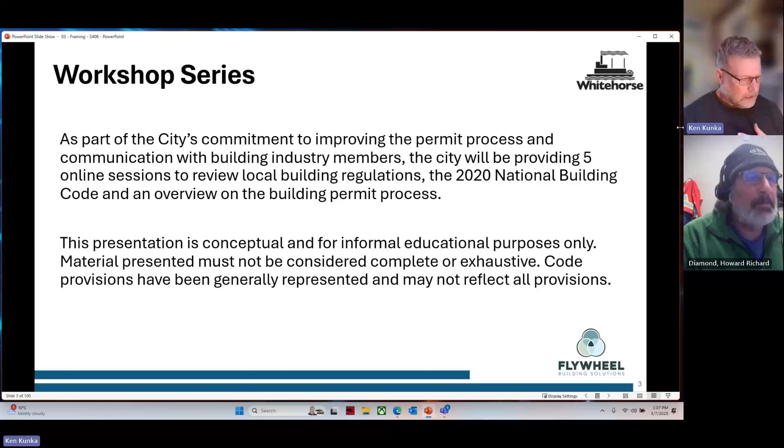What I'm trying to do in this video series is just remind you, as participants in these videos and presentations, of the parts of the code that I feel are critical. It's really up to you as an industry group to go into the code and read in more detail.

Our workshop series: January 15th of this year was a general overview with excavation, and February 12th and March 5th covered fire protection, which we recently recorded. Please also review that in our video series, as part of the process of developing guidelines and bulletins related to the permit process and a better understanding of how that relates to plans and inspections leading into occupancy. We're hoping to have that mostly done by the end of March 2025.

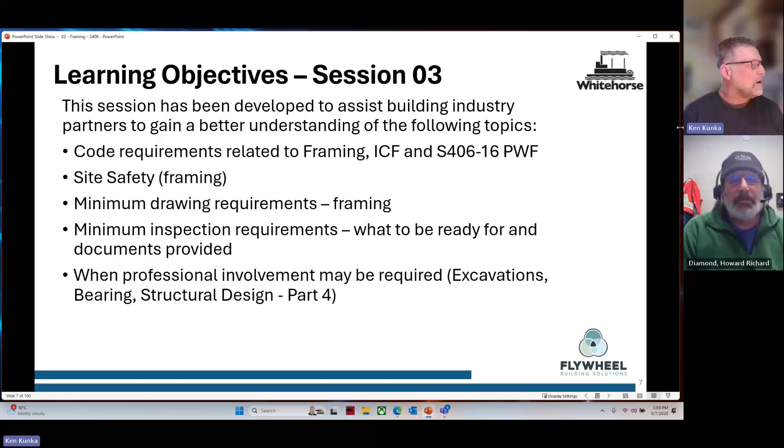Learning objectives in this session: again, to look at the code in general and dig into some of the specific requirements related to framing. So we have code requirements related to framing, site safety items - a big reminder for both building officials and our industry partners to make sure sites are safe - minimum drawing requirements, minimum inspection requirements, and when professionals are involved, since those have been updated a little bit along the way in the last 12 months.

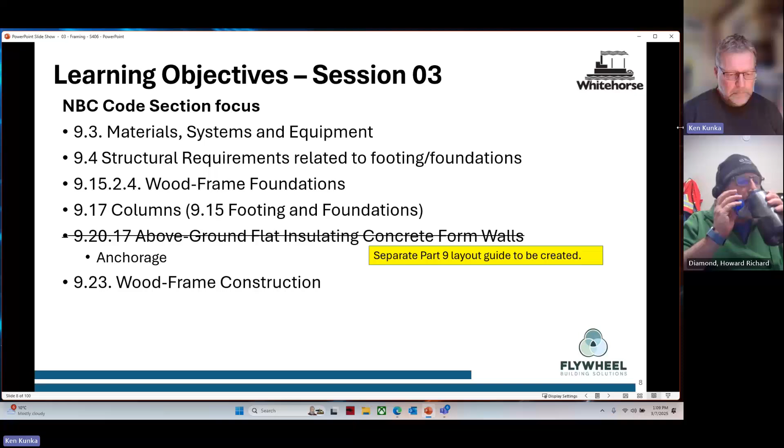We're going to dig deeper into 9.3 material systems and equipment, and 9.4 structural requirements. So just a little bit of back history, why it's in the code, and some basis for moving forward on developing wood frame foundations, columns, and wood frame construction. I was going to develop a bit more on above-ground flat insulating concrete formwork, or ICF, but I think what we'll do is work on a separate guide related to that.

The learning references in developing this webinar series: obviously the building code itself, the 2020 edition. There is an update on the Housing and Small Buildings Illustrated Guide, so I've pulled a few of those diagrams, but this is a great resource document for you and anyone using the National Building Code. We have the BC Housing Safe and Durable Wood Decks and Balconies guide, which is great for building better decks and balconies - I'll provide some reference points to that. Also the Canadian Wood Council Span Book and a prescriptive residential exterior wood deck span guide.

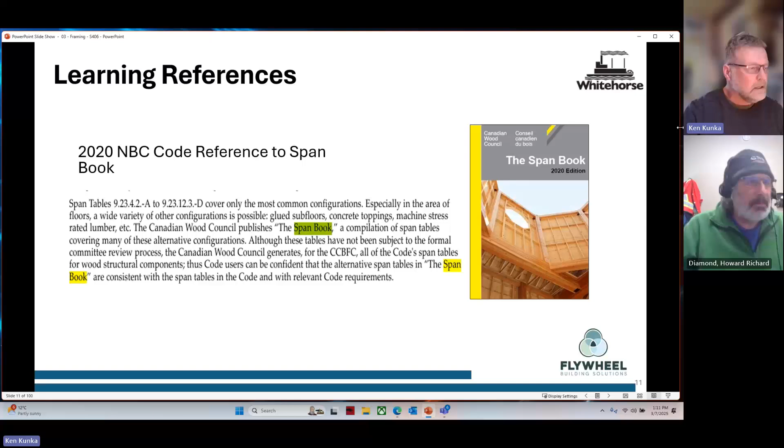As I was going through some of the other guides, I was referring to this older document related to decks. There have been questions related to the span book, but within the National Building Code appendix note, it actually makes reference to it. So I think we're in good standing using this document, which is actually quite thick.

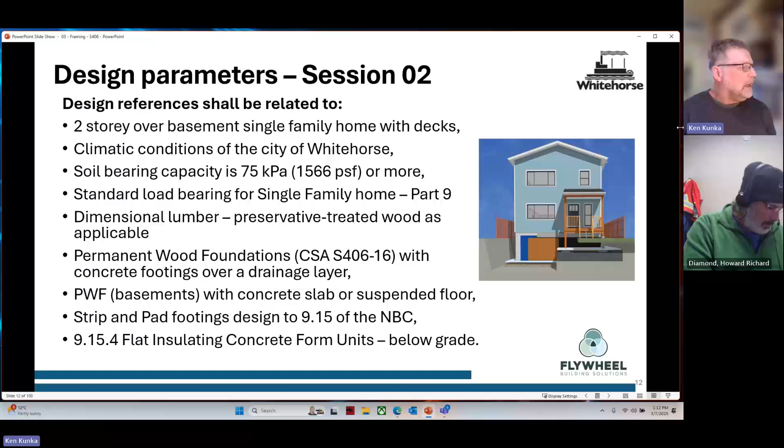I've been using a reference house that I've been slowly building out, and this will be the reference house we'll use in developing the guide related to good drawings and how those drawings relate to inspections out on site moving into occupancy. It'll be a two-story over a basement, single-family home with some decks, using climate conditions of Whitehorse, soil bearing capacities - that's minimum 75 kPa within the code. Standard load bearing, nothing very special about the design itself. Dimensional lumber, permanent wood foundation, but we also like to look at an ICF design as well, with typical strip and pad footings.

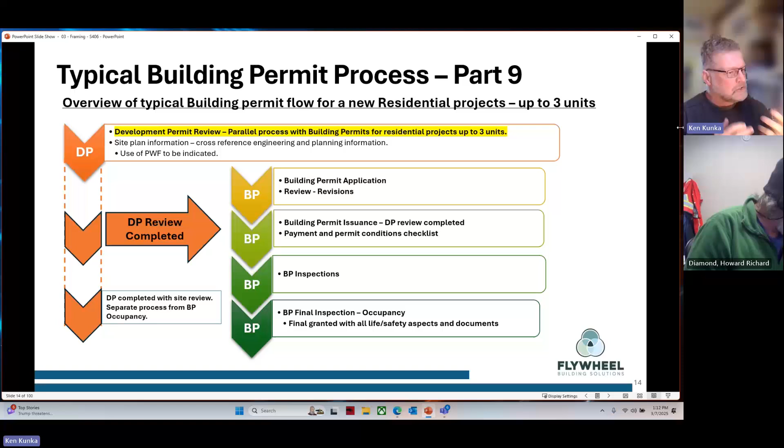Typical building permit process - just as a reminder, the development permit review process has provided a parallel process for up to 3 units. It used to be a two-step process and now it's one-step. But the challenge is ensuring communication between both parties, planning and engineering and the building department review, especially as revisions are required or provided, just ensuring the parallel review process doesn't break down moving into issuance.

It's critical to ensure the BP application is filled out and all required information is provided. Please read the application package in full to ensure all required information is provided. In 2025, to improve efficiency of the plan review process, if it's incomplete on the application side, it will not be accepted. Please note the BP, site plan, and lot grading information should match your building permit drawings.

When you deal with different structures, perhaps even retaining walls, but particularly garden suites, they will more than likely require a separate permit. Referring to the city's permit checklist guide is of critical importance in developing a good permit package, and all drawings should provide enough information to show substantial compliance to the code and city regulations, which helps reduce turnaround time for review and reduce requests for further information to ensure compliance.

Please apply early. Do not wait until the end of spring or early summer if you are planning a project in the summer. There's a lot of volume coming in, and particularly with some of the changes in processes, we want to ensure nobody is left caught with an extended review time because of volume.

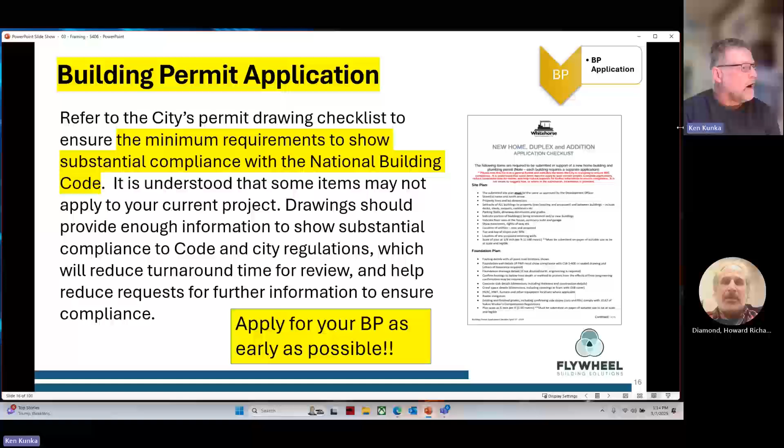Building permit drawings - it's important to ensure your foundation, floor plans, sections and details clearly show framing systems dimensioned clearly, location of all walls and point loads to the foundations, your joist, rafter, truss, beam sizes, and your layouts are provided. Those are your manufactured layouts of floor systems, engineered floor systems, or truss systems, making sure point loads and bearing details are clearly shown and reflected in your design drawings.

Any required bridging or blocking is shown, and any manufactured beams, lintels, roof trusses - making sure all those components that are third-party shop drawings are transposed into your design drawings. These items may be submitted prior to the request for a frame inspection. As part of the new process, you provide those truss drawings, the floor joist drawings - they don't have to be sealed, but when you move into the framing process, you do have to provide sealed truss packages at framing time for a proper inspection to ensure all engineering components meet minimum standards.

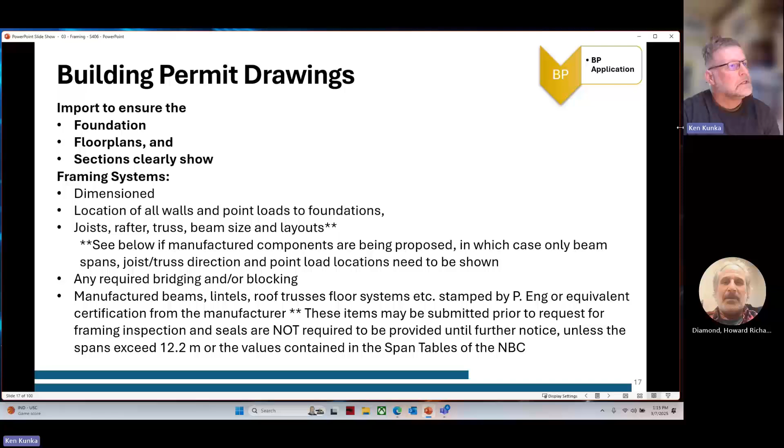The building permit application professional involvement - I'd highly recommend reviewing the website and these bulletins outlining the new requirements, and also reference the building bylaw 9950, which I believe will be updated sometime this year into next, just keeping up with changes in our industry.

The factors for the city requiring increased involvement for engineers: new house designs are narrower, our subdivisions are different now - narrower lots, longer lots. You have open plan layouts with larger point loads outside the scope of Part 9. We have an increase in engineering building components and proprietary products not listed in Part 9. And soil conditions can create concerns related to safety, bearing capacity, drainage and backfill. In some of our newer subdivisions in Whitehorse, the soils are a little different, creating concerns already regarding bearing capacity and frost action.

Quick review again with climatic data in Whitehorse. We're in climatic zone 7B, just a reference point on our snow loads. It's interesting for myself, working down in Summerland, British Columbia, and then coming up to Whitehorse and looking at climatic data - the snow levels are actually quite light compared to other parts of British Columbia, particularly where I am in Kelowna.

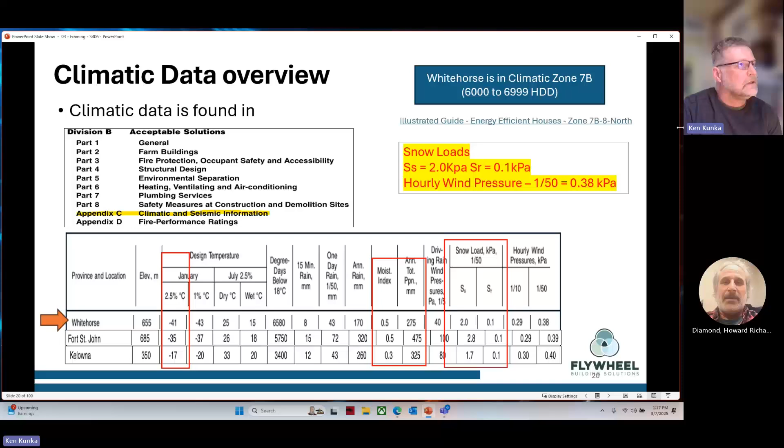So there's our snow load - we have a roof load of 2 kPa, and a rain of 0.1. Again, fairly light. And our hourly wind pressure, which will probably come more to a concern as codes are updated and we look at more lateral load bracing for wind and seismic.

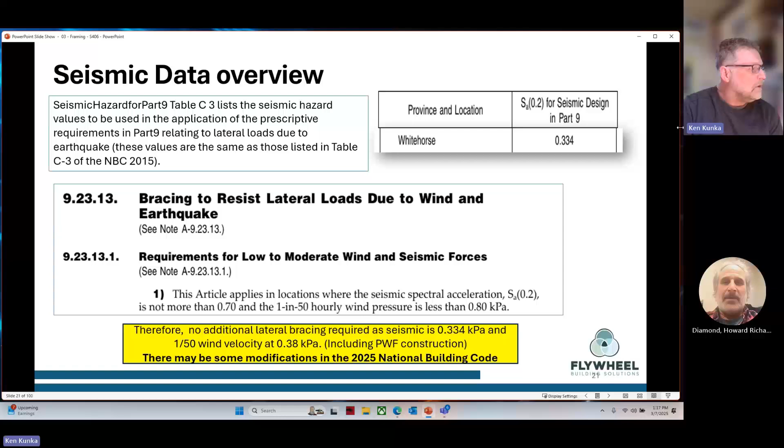And speaking of seismic, right now, as the code stands and your seismic data within the Whitehorse area, we're not really concerned about this. I'll touch base on it one more time as we close up the seminar today. So no additional lateral bracing required right now, but I just want to touch on that one more time as we move through the slide deck.

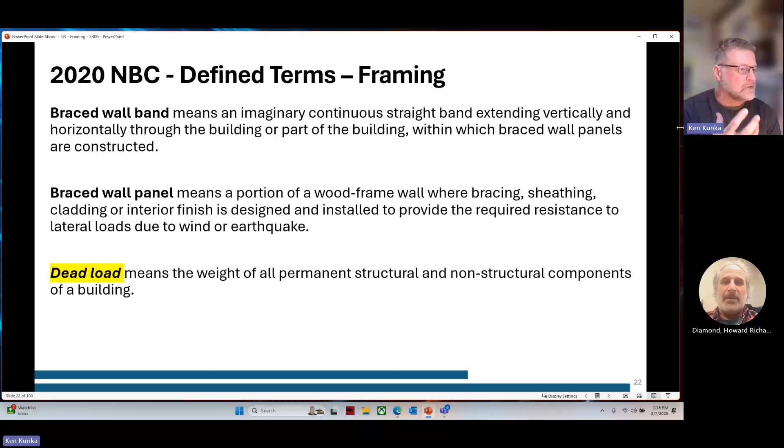Some defined terms: braced wall band and braced wall panel - not necessarily right now, but as we move through the summer and the new codes are looked at updating into 25, 26, this may come into play. You have your dead load, meaning the weight of all permanent structure and non-structural components of a building. That's your superstructure, your gravity loads that you're thinking of when designing your spans and loads accordingly.

You have your live load, meaning a variable load due to intended use of an occupancy - the people in it, or the type of use. Different building types, as you get into commercial operations, have a different load parameter than residential. That's the occupancy type. Assume the design and structural members of the building includes loads due to cranes and pressures of liquids in containers - these things that come and go are in it. Again, snow and rain are live loads as well.

We have load bearing - thinking about our structure, we have non-load bearing walls and load bearing walls, and they have different parameters. We'll go over some of the charts later on, particularly regarding wall assemblies.

We have a rim joist - that's really the only defined term. When you get into the details of framing, it means the outermost member of the flooring system, other than blocking, be it parallel or perpendicular or at an angle to the floor joist. A rim joist in the field may also be referred to as rim boards, headers, and header joists. So there's a mixture of terminologies.

I typically would throw an unsafe condition, because that gives some allowance for our building officials to determine potentially unsafe conditions, whether a permit is required, or there is an unsafe condition during the construction process.

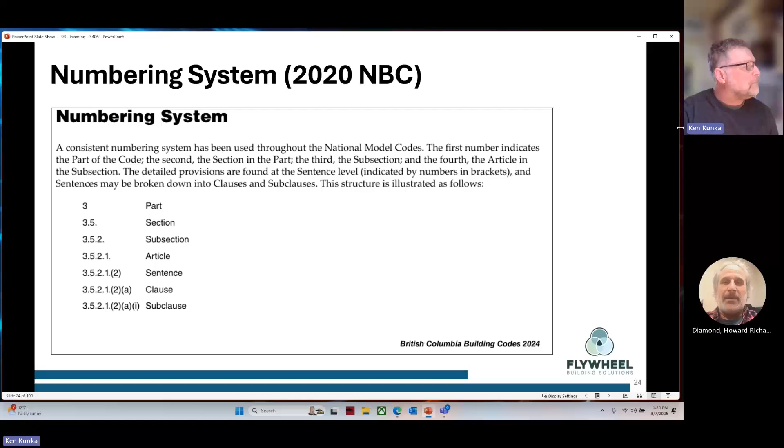9.3, materials, systems, and equipment. The materials, systems, and equipment commonly used in the construction of buildings are covered by standards prepared by various organizations. These standards are referenced throughout NBC Part 9. NBC Section 9.3 was developed to provide requirements specific to three basic construction materials, namely concrete, wood, and metal.

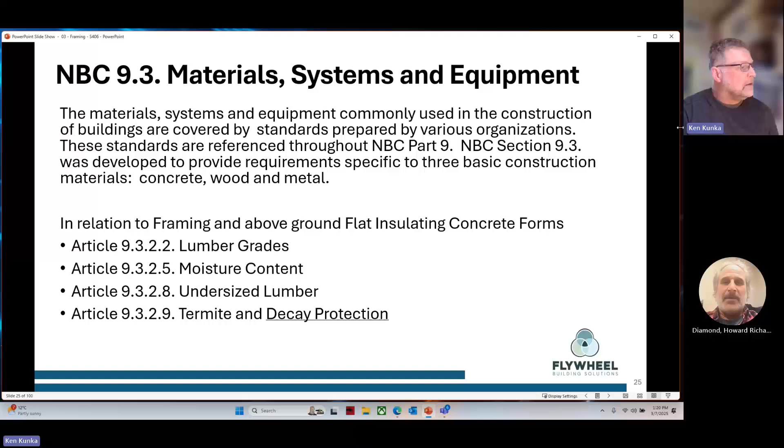In relation to framing and above ground flat insulating concrete formworks, we have 9.3.2.2, lumber grades. We have a review of moisture content on undersized lumber and termite, and particularly decay protection.

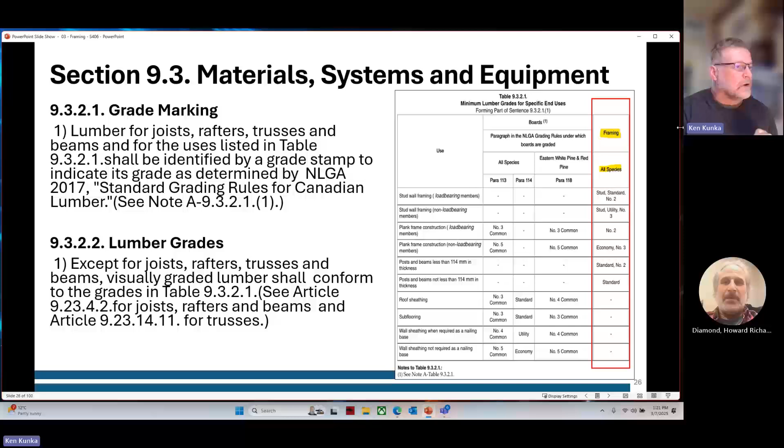Grade marking for lumber used in joists, rafters, trusses, and beams as listed in table 9.3.2.1 shall be identified by a grade stamp indicating its grade, as determined by the standard grading rules for Canadian lumber. It's really important to understand that. On the right side of the screen we have framing, and the nice thing is we have all species represented, not just a particular type. But you do have to be cognizant of the standard or quality of wood, so we have number 2, number 3, and economy grades, and where those are used.

Machine stress rated lumber, we just went over that, it's defined in the code at 9.3.2.4. There's also an outline for OSB, wafer board, and plywood marking, and those all have similar types of marking.

But the most important thing I noticed when I was up in December, and a bit of a concern for myself, was the moisture content. The moisture content in wood being delivered on site should not be greater than 19%, and that should also be maintained through the construction process. What I was seeing in the winter months was a lot of heat going in, with a lot of moisture in it, probably from propane or whatever was being used, and you could see a lot of frost actually building up in the walls.

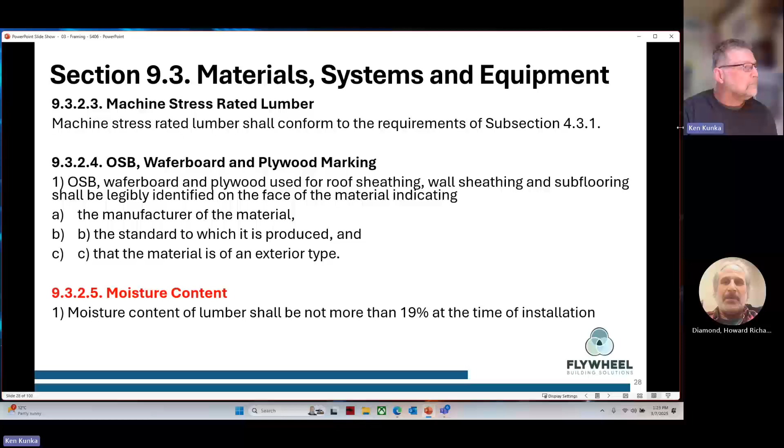This is a huge concern, because once framing inspections are completed and you're moving into insulation, vapor barrier, and air barriers, you could be locking a lot of moisture in if you're not taking particular precautions. So again, the maximum moisture content permitted for lumber at the time of installation is 19%.

At that moisture level, more than half of the wood's normal shrinkage will have already occurred. That's a big part, especially if you're building higher buildings in wood, where you can get a lot of shrinkage horizontally, not vertically in a stud, but in a plate. A plate could shrink anywhere from an eighth to a quarter of an inch. After a number of stories in wood, even a 3-story house with a deck attached that has vertical posts, you can see a significant change in how the building shrinks and dries if it's at a higher moisture level.

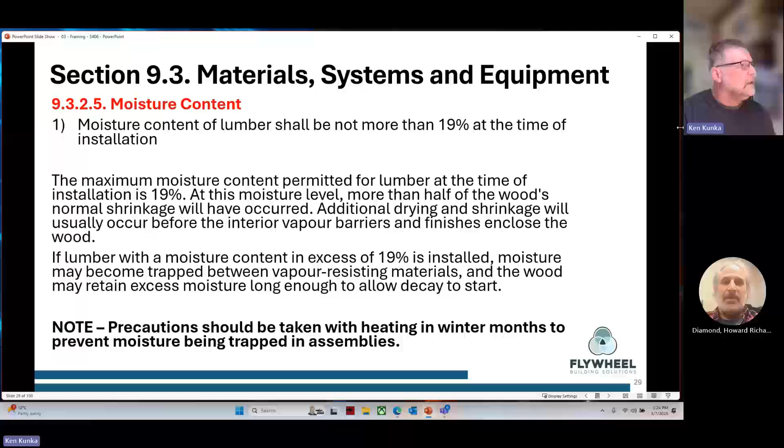Plus the issue of having all that moisture locked in and then sealed up could lead to significant mold and eventual structural damage, which we experienced here in BC a number of years ago. Not necessarily termites we have to worry about, but we do want to be cognizant of decay protection, which is why there are minimum requirements.

I know a lot of the wood being used in your area, particularly for foundations, is permanent wood foundation material. But when you have other elements, like a deck, or you're framing above your permanent wood foundation or ICF, there's a minimum level you want to keep it at if you want to use standard dimensional, non-treated lumber, which is 6 inches or 150 millimeters. Structural wood elements below that should be pressure treated, so that's at 6 inches.

And where wood elements are not protected from exposure to precipitation, such as an open draining deck, or a configuration conducive to moisture accumulation, you need to be careful. There are some really odd, modern designs coming in now, like butterfly style roofs, or roofs leaning back toward the building itself, which can hold moisture.

We have frost action too, which we've talked about a couple times now, that can actually direct moisture back as well. And thankfully, at least we don't have a moisture index to worry about here.

There are many above ground structural wood elements where precipitation is really trapped and drying is slow, creating conditions conducive to decay. This happens with elements that have elaborate detailing where you're not really thinking about flashing and how water and snow can get in there. And again, your grade clearance can be a problem.

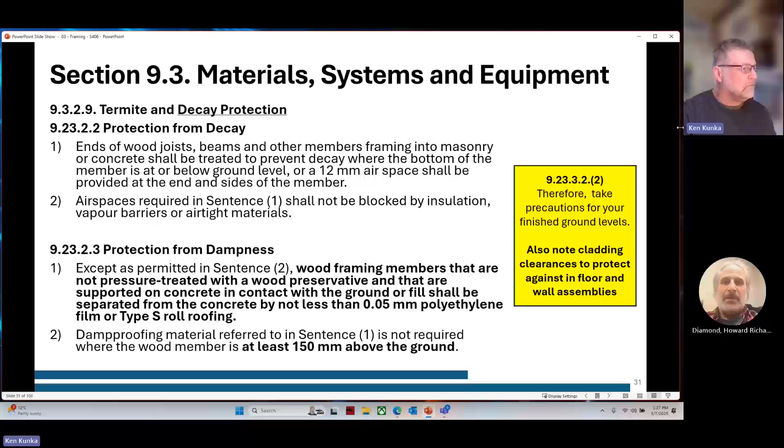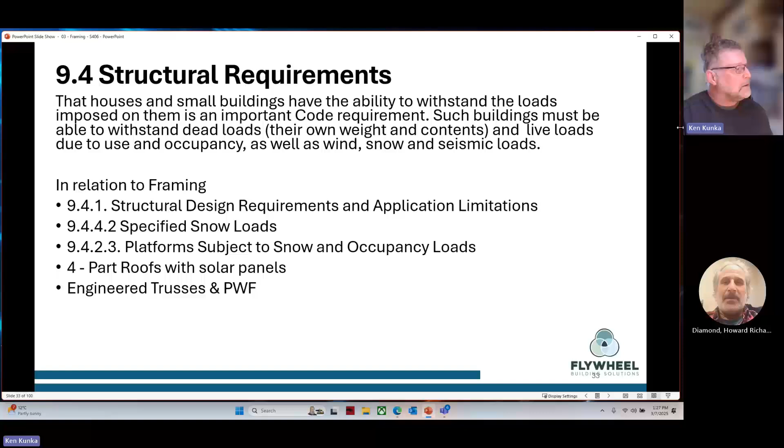The structural requirements, 9.4. We're just going to touch on these four or five elements here: 9.4.1, 9.4.2, the specific snow loads, platforms subject to snow loads, so your decks and deck uses, roofs, Part 4 roofs and solar panels. This again touches on the changes happening regarding engineered trusses and permanent wood foundations in engineering.

Structural design requirements and application limitations. Again, a lot of my sessions are just talking about code and showing you code. So I just want to make you aware of where it is in the code and really ask you to go into it and get a good understanding.

Looking at item 1C: be designed in accordance with Part 4, using the loads and deflection and vibration limits specified in Part 9 or Part 4, where floor framing is designed in accordance with clause 1B or C, and where supporting wall framing and fastenings or footings are designed according to clause 1A. You'll also notice in a lot of the code they're back referencing, saying 'except for,' so be mindful as you're reading through this that you're also cognizant of other parts of the code or another standard.

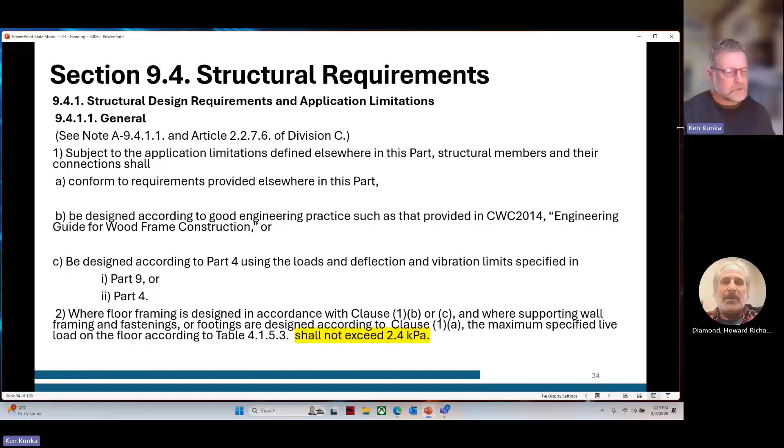Again, here we have CWC 2014. As you go through particularly structural building products, you want to look at these, and really we're dealing within a specification of loads. In this one, the last sentence, highlighted, shall not exceed 2.4 kPa or 50 pounds per square foot. So again, there are some limits on the loading, dead and live loading here.

This is an example of the specifications to keep you within Part 9, designing a true Part 9 home. Homes are a lot different than they used to be. They're narrower, have more open floor plans, more point loads, and more detailing, which makes it difficult to keep a lot of these projects within Part 9. So Part 9 here is specified loads.

We're dealing with very standard construction. The subsection applies to light framing construction, whose wall, floor, and roof planes are generally comprised of frames and small repetitive structural members. Again, keeping it very simple. The whole point of Part 9 was to have basically a homeowner do this, so the structural design should be very simple, and a lot of it is prescriptive in Part 9. The roof and wall planes are clad, sheathed, or braced on at least one side, with small repetitive structural members not spaced more than 600 millimeters or 24 inches.

The clear span of any structure does not exceed 12.2 meters, which is about 39 point something feet. So when we're looking at trusses in homes or Part 9 buildings, which could be commercial as well, if you go over that line of getting to 40 feet, you're now kicking that from a Part 9 type structure into a Part 4 design. So for engineered trusses, say a 42-foot wide building without a center bearing point in that truss, you're going to kick that into a Part 4 component.

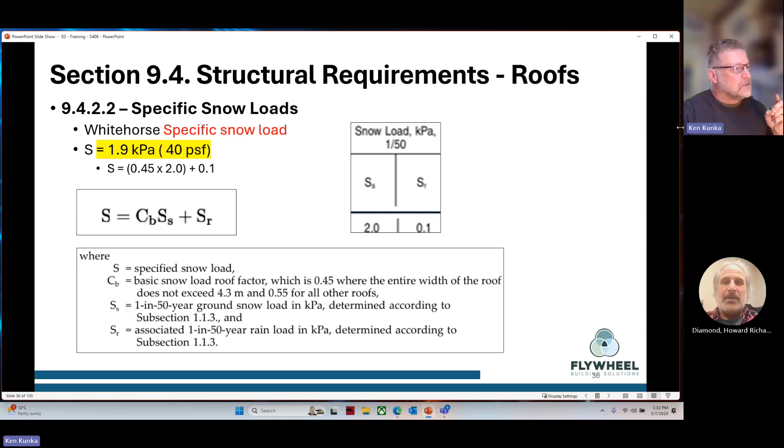Thankfully we don't have really heavy roof loads, but when we get into decks, decks shall be considered as roofs - we can treat them both the same because of the 1.9 kPa requirement. Balconies, decks, and other accessible exterior platforms intended for occupancy and subject to snow loads shall be designed to carry the specified snow load or 1.9 kPa, whichever is greater, where the platform or each segregated area of the platform serves a single dwelling unit. It's important to keep that dwelling unit distinction in mind.

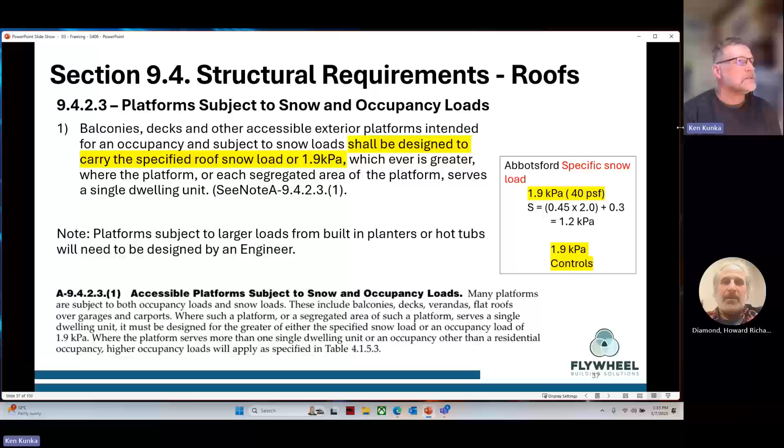Here's an example - I used Abbotsford, not sure why, but it's very similar to the relationship of what's happening in Whitehorse, showing a platform subject to large loads from built-in planters or hot tubs. If you have one of those very heavy loads, almost more permanent even though they're technically temporary - a hot tub is temporary but it is a structure - you'll definitely need engineering on that. There are some appendix notes covering this.

The NBC, as well as the BC, has now done a more thorough review of how solar panels affect roof loading, and there are newer parameters built into the design requirements. It makes sense to take advantage of solar given the sunshine in summer, but even though photovoltaics are very light themselves, and may run parallel to the slope of the roof or sit flush, they do have a tendency to collect snow due to wind drift, especially where panels are lifted up. If you have a lower slope and the panels are tilted up to maximize solar gain angle, that can create significant issues. Similarly, certain roof types like metal roofs with snow breaks can create problems by holding snow in a position it was never designed for. You want to take these factors into consideration when designing your attic specifications and roof layouts.

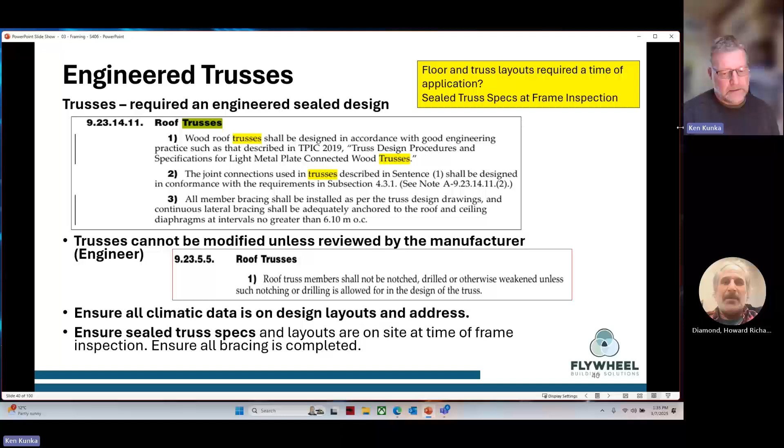Because they are very specific in design, they need an engineered layout of the roof system and particular specifications for each type of truss or girder truss. Again, that's nothing new—that's why the bulletin is going out as a reminder.

Another point is roof truss connections—the metal connectors—which are very specific and have to be properly designed to do their job. They are a Part 4 component.

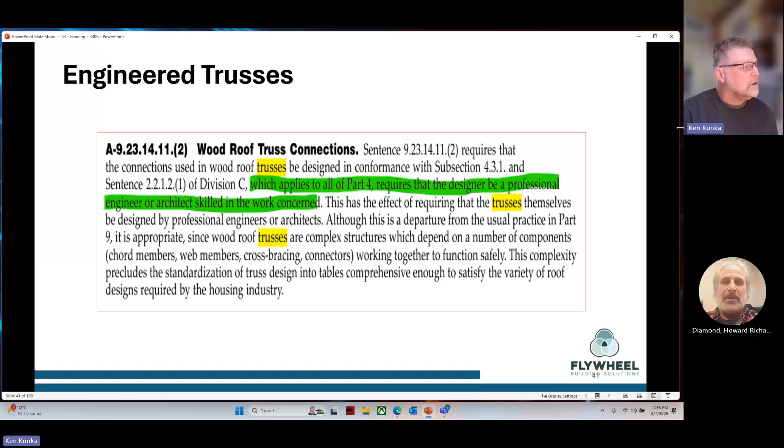Permanent wood foundations have been used for a long time. In the Whitehorse area, what's really changed is the soil conditions they're now being placed in with new subdivisions, along with frost movement pressures and design elements in newer buildings—that's where we have these triggers.

What's outlined in the bulletin are the standard prescriptive elements of Part 9—how to design components related to spacing of wood elements, the type of wood elements, and how they're put together. Now we're getting beyond the parameters where Part 9 or even the standard can be worked with, and that's why more engineering is required for permanent wood foundations.

I myself was involved in a couple of incidents with WorkSafe, or poor WorkSafe methods, as a young person moving into the construction field. As a reminder, we want to make sure your workers are safe on site, but also that building officials are safe on site—and they can refuse work if there's an unsafe job site.

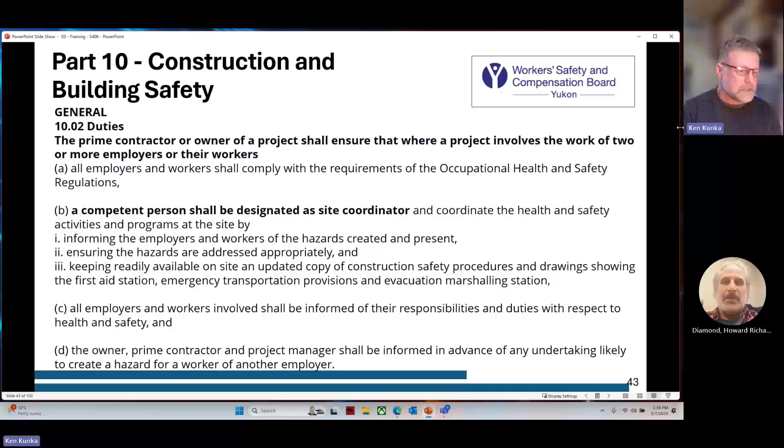It really starts with keeping somebody on site who is overseeing what's happening. It's important that somebody is responsible to be on site, and when calling for inspections, that person should make sure it's safe—whether it's snow removal, ice removal, or keeping the job site clean, with no unsafe areas while walking around the framing component.

Here we have fall protection, but not necessarily just fall protection—it's more about having temporary stairs on a project versus a ladder, because technically a building official shouldn't be going up a ladder. You should also be making sure framing openings are properly addressed.

If a building official or anyone on site is looking up at a truss element, they shouldn't fall down an open set of stairs, whether temporary drywall barriers have been removed or not—those protections have to be in place. Even WorkSafe compensation standards outline trusses and their proper erection to make sure it's safe. Ultimately, as noted, housekeeping on the job site is key—making sure it's clean with no tripping hazards.

Columns 9.17. Columns transfer beam loads down to solid bearing. In basements, columns carry the load directly to the footings, which distribute the concentrated loads over a wider area. The beam loads depend on the type of occupancy, the size and support, floor or roof assembly, and the number of floors to be carried.

As we look into code, there are some limits on how these columns are used. So we have beams, headers, joists. A column that's carrying the beam or header joists carries loads from not more than two levels - two levels of wood frame balconies, decks, or other accessible exterior platforms, or one level plus a roof. You'll notice in one of my drawings, which I'll bring up next, that I have two levels of deck and a roof, and that could create some issues on keeping that within Part 9.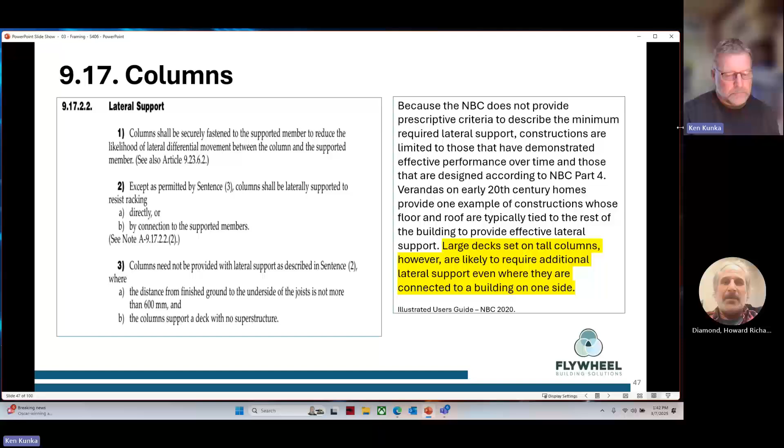This part of the code actually tells you the minimum sizes and why we try to follow them. Sometimes you'll see a 4x4, or a built-up post that's only 2 elements, and that creates a problem because it doesn't provide a lot of lateral support and enough material to tie in a beam and post connection. They're very prescriptive on the built-up columns, because when a wood column is subject to a vertical load - that downward gravity load and live load - it's resistant to buckling depending on the slenderness ratio.

So again, as a column gets taller, there isn't a prescriptive requirement in Part 9 that allows you to just beef up that column, maybe go to an 8x8 or a bigger built-up beam as you go higher. My understanding is there isn't. That may be a call for a building official who doesn't feel comfortable with a 2-story deck assembly at these spacings, and even adding bracing or knee bracing support may trigger engineer involvement.

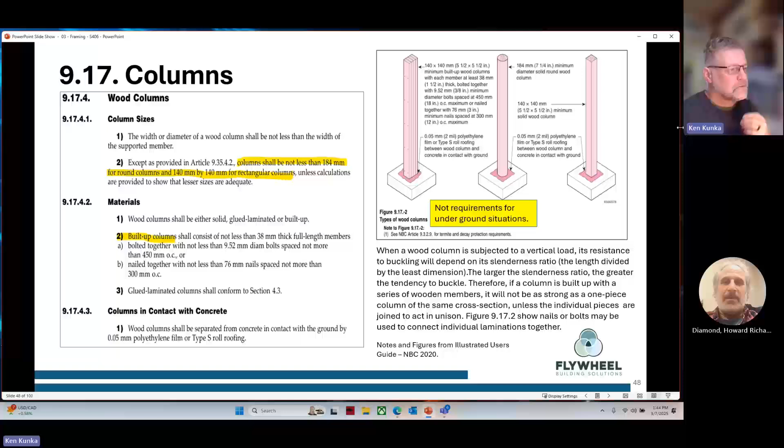It's interesting, there's no reference to screws when dealing with these structural elements, but I know a lot of screws are being used out there. There are a lot of great products, including Simpson Strong-Tie, but it's not really prescriptive. That's where it gets challenging for a building official to look at all this proprietary product that's not listed in the code.

We're going to go through a quick layout example, one used in the footing session 2. It's a 2-story house over a permanent wood foundation, not very big, 24 feet wide by 40 feet long, with an attic truss - an engineered truss system with attic space, not a living or storage space. Very standard, and we have a concrete basement slab and concrete footings.

This is a very simple example, but I wanted to show that something could be happening down in the basement that we want to take into consideration. As mentioned in our footing session in session 2, you do allow for some ratio to spread these out, and this is how it lays out in this element of loading.

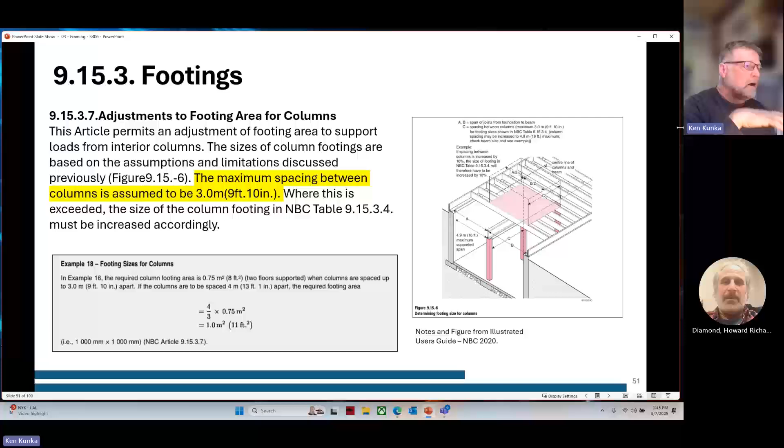So as I explained, we have certain dead and live loads concentrated in particular areas, shown here in pink in the center. We're taking basically half that floor joist moving to the outside, to the exterior walls and those structural bearing points, and the rest moving down to the center point of our columns in this area.

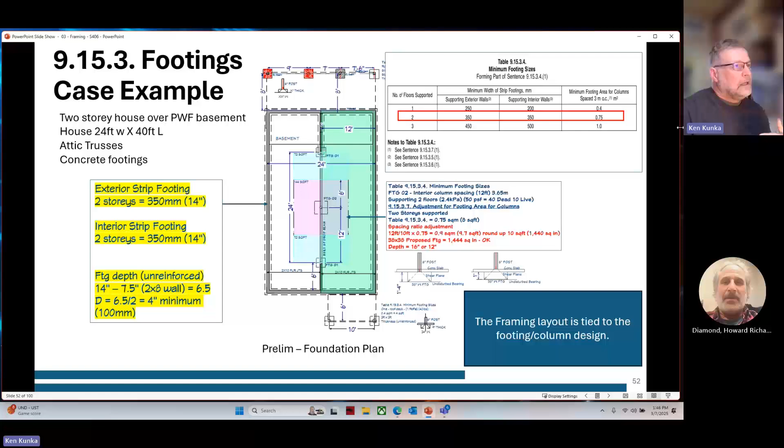Just a reminder how we find the dead loads, how we're sizing these elements, and then taking these design loads for the footing designs and how they transpose to columns. The framing layout is tied to the footing and column design. Even though you want to increase your spans, you really have to look at what you can do on the footing side of things. And we look at the footing sizes.

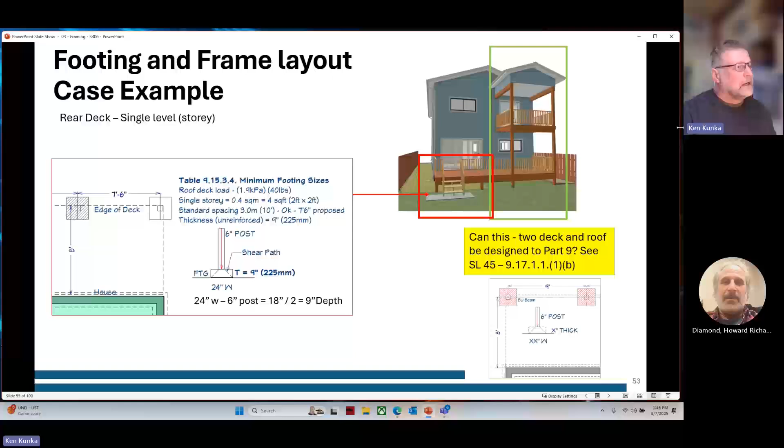I'd mentioned this example of a two-deck design, both in footing design, and we're going to go over that at length when we get into the guide. That may trigger engineering, or just the level itself of two levels of deck and a roof may be problematic. Remember, when looking at this design of multi-level decks, we have limits, and those limits are in 9.17.1.1.

Always ensure it's centered on the post and columns. Sometimes you may be using a concrete pier type column - I don't think that's used very often from what I see, but there are actually maximum height limits to those. If you have a concrete footing and a concrete pier, then your saddle and wood post element above grade, there's a maximum length of that pier column based on the dimension of the width of that pier. So if you have an 8-inch concrete pier, it can only go 3 times, so only 24 inches vertically. Again, because concrete is designed in Part 9 to be unreinforced and very simple in its uses, it limits the spacing of those as well.

So again, even though you may be able to take a wood post and especially your wood beam, your built-up beam may, by the span book, be greater than a certain amount of length.

It cannot actually exceed some of the parameters within the piered foundations on that. I'll add one more slide into this as I repost it online. Wood frame construction in general, platform framing is most commonly used, is this element in here.

So we have platform framing and we used to have balloon framing, which had some really significant elements in protecting against fire, as we talked about in 9.10 in the video series and slide deck. Balloon framing actually creates an avenue for heat, fire and smoke to move through the exterior walls because that fire blocking element isn't there. You can see here on the right side of the diagram where that fire blocking isn't in place, and we go over that in the fire protection session in quite detail.

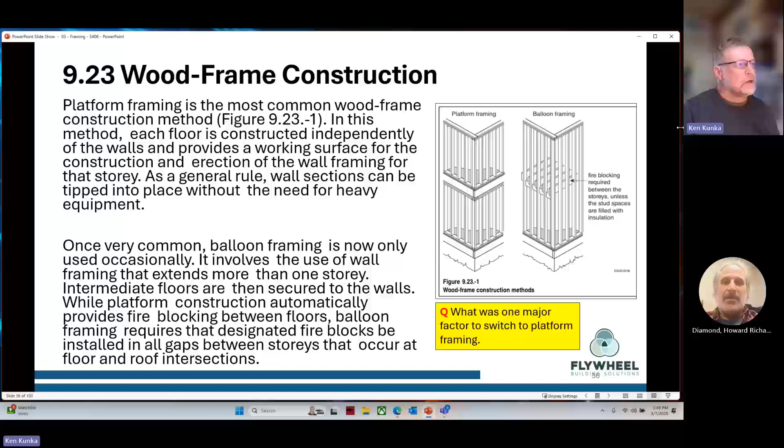So again, just the history, we used to balloon frame. I think some of that may be coming back to use more wood in higher structures, with better guidelines on it, but we're talking about platform framing as a whole here.

Framing without an engineer, again just repeating what we talked about in 9.4, it's brought up again in 9.23. This section applies to construction where walls, floor, and roof planes are generally comprised of lumber frames, small repetitive structural members, or engineered components. So you may have some engineered components, maybe one or two beams. Again, your engineered truss system is an engineered component. Over time, we've realized the general floor layouts and truss layouts provided by building suppliers, as long as they're engineered and those specs are sealed, can be used in our whole Part 9 package without getting too much engineering involved.

So 24-inch on-center spacing construction does not serve foundations. The specified live load supported by subfloors and framing does not exceed 2.4 kPa, or the total live and dead load of 50 pounds per square foot. Where conditions exceed any of these items above, the framing and fastening shall conform to Subsection 4.3.1 - moving this into Part 4.

The last item I forgot is the span of any structural, it's 12.2 meters on that matter for trusses - being careful on your building spans and how the bearing points sit. You don't want to exceed that 39.8 feet. If you have a house at 42 feet, you're kicking into engineering.

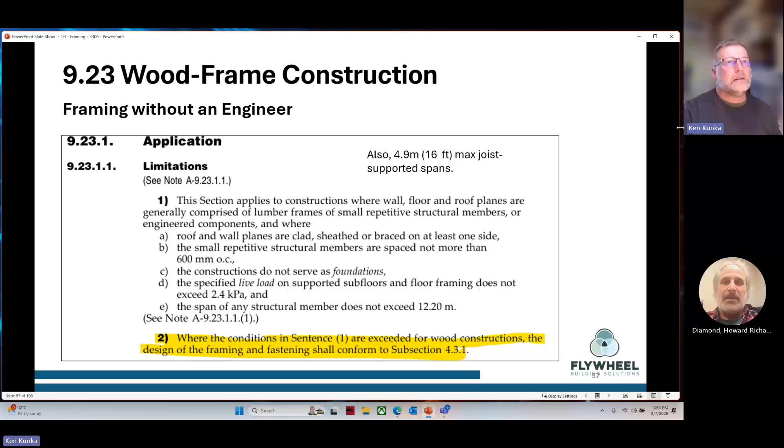And just another reminder, 4.9 meters is the maximum joist span for supported span - so joist supported span comes into play with your foundation system. If you have a joist span exceeding those, the foundational supports have to be engineered as well. So you always have to be thinking of your foundation and your framing elements working in connection with each other.

The foundation types - just a few slides. A reminder that we're working off S406-16, reconfirmed in 2021. There's also another guide by the Canadian Wood Council related to permanent wood foundations. Permanent wood foundations are outlined within the National Building Code, and this is the specification for this - both for foundations and wood frame floors.

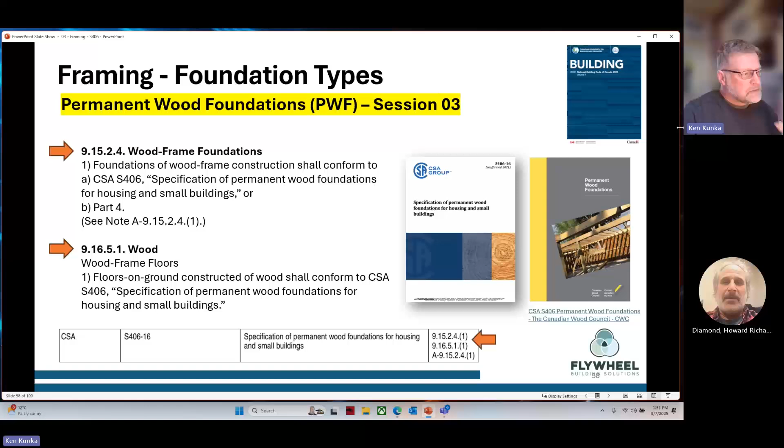You'll notice at the end this is a reference point within the first part of the National Code - this is a standard specification of permanent wood foundations for housing and small buildings. These are the specific items within the code that relate to this, not a lot, but these are the two that I've listed here.

Permanent wood foundations - again, looking back at the appendix notes of the code, it's very repetitive. We're looking at the design parameters you can use with this standard and some of the code elements in Part 9. Once you go over those limits, that's what the bulletin created by the building department addresses - if you start going over these point elements, that's when it requires the engineering component.

So we have permanent wood foundations, the design assumptions: a soil bearing capacity of 75 kPa. In session 2, we determined that the minimum standard or minimum bearing capacity we're working off in the code is 75 kPa, or 1,566 pounds per square foot. So that's our minimum - it's really important to understand your soil conditions.

And in the older parts of Whitehorse, we're probably dealing with more gravel, more denser materials - materials that weren't quite as susceptible to frost action or very wet conditions.

You really have to understand the bearing to understand your footing design and everything else above it. Again, same parameters of floor spans, clear spans. So we're talking about 4.9, we have 5 meters, so we're very close in that parameter when developing designs of maximum joist spans. Floor loadings, again, very similar, 1.9 kPa.

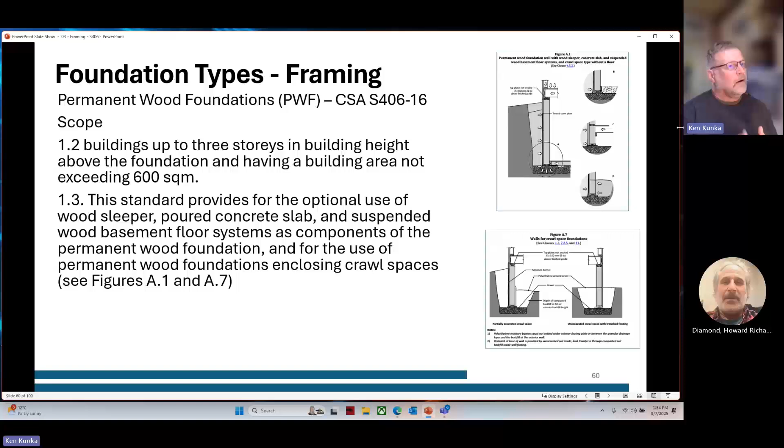The standard provides for the optional use of wood sleepers, poured concrete slab, and suspended wood basement floors as components of the permanent wood foundation, and for use of permanent wood foundations enclosing crawl spaces. So a lot of latitude on how you can develop that, but some challenges too, in making sure you understand the detailings within the guide and also how that relates to Part 9 framing components.

That's why I wanted to bring this up. There is a great, obvious benefit for using permanent wood foundation, but there are also some limitations. The benefit is building in cold weather application, it's trade centric, so you have the same crew building your wood framing components above grade likely also doing your subsoil permanent wood foundations, and perhaps even a lower cost, particularly building in the off season and needing to introduce hoarding and heating.

But we also have some challenges. In the guide, it outlines backfill and soil problems, and we're running into some soil problems. That's why we're looking at more engineering in the wood elements of permanent wood foundations and ledgers. This has been brought up a couple times by a number of different inspectors: you can see in this detail that they're having this framing component elevated above your granular material, which is allowed under the standard and outlined.

But it mentions a ledger, and a ledger is not referenced in this standard as the appropriate way of attaching that to the superstructure. It's also not intended for use within Part 9 because it's not outlined within Part 9 of how to do that. There is a different way of doing that: extending the joist to the frame elements and using a ribbon board.

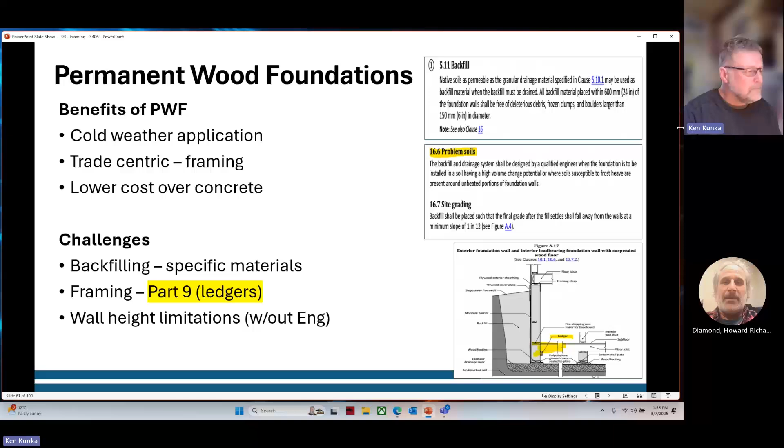And again, just a challenge of the wall height limitations. Just remind you again, ledgers are not within Part 9 of the code. So you want to develop this element shown here, a ribbon board with the joist structurally attached, and that is within the standard and within Part 9 of the code. So be very cognizant - again, fire blocking and fire stopping are two very different things. Also be mindful of the details.

So we're moving from permanent wood foundation to dimensional lumber, and there's some very specific detailing requirements, both parallel and perpendicular to your bearing walls, your permanent wood foundations, or your non-load bearing walls. And then when we get into the elements of creating openings, whether it's a crawl space opening to your basement level, your crawl space, or a true stairway, there are some very specific diagrams.

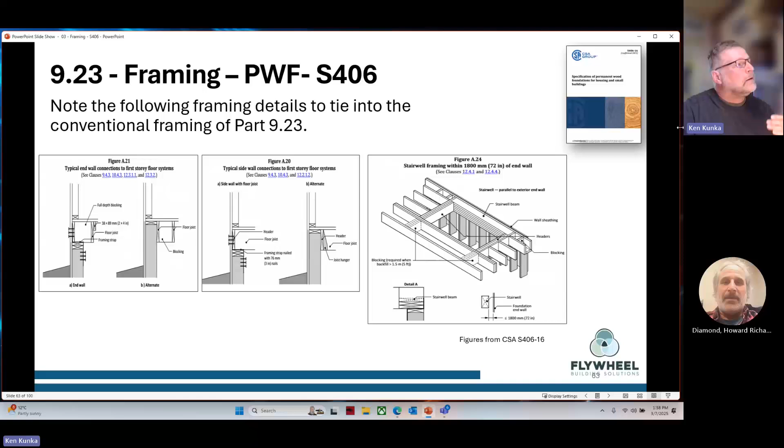So you're developing a horizontal beam to prevent that movement of that wall. There's some very specific items within the standard, and again this is within the standard. It doesn't need engineering, as long as you stay within the standard prescriptive requirements and also those components of Part 9. And again, trying to stay from Part 9, but we're dealing with a lot more complex drawings and buildings out there, and the issues regarding backfill.

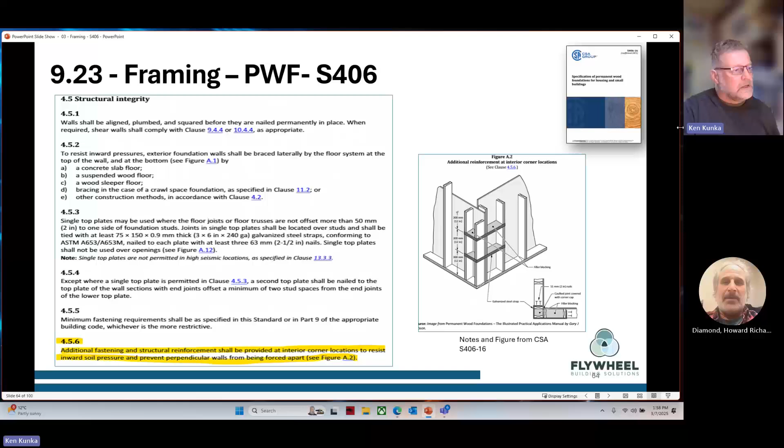Be very careful. This is a precursor to what we're trying to learn here in BC, which is lateral load and seismic and wind loading, is bracing the corners. Be very mindful here: additional fastening structural reinforcement shall be provided at the interior corner locations to resist inward soil pressures. So we have these exterior corners and we have interior corners to protect ourselves, and this is outlined within the S406 standard.

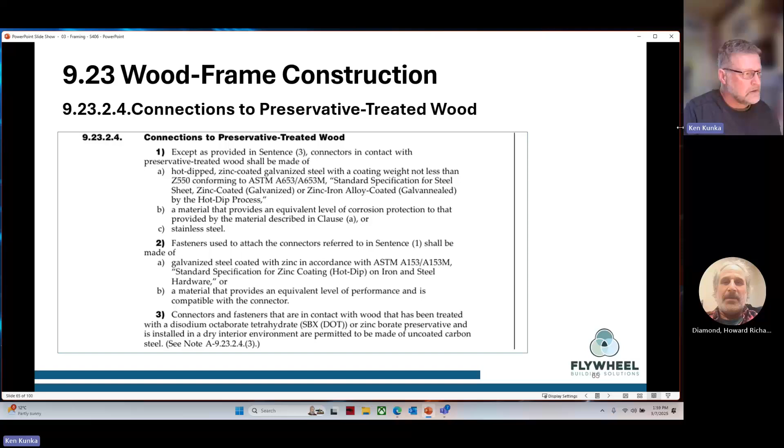Connections to preservative-treated wood. I'm sure you're very well building in Whitehorse for a long time. This has been a code change from a number of cycles ago, that the materials now used in the treatment of wood products is different, and it has actually caused issues with the structural connector, the metal within the connector. So you have to make sure you're using the right connectors in there, that would go with your brackets, your saddles, your hangers, and any of the fasteners you're using. Just being mindful and careful in these elements.

Within 9.23.3, fasteners and connectors, it outlines standards for nails and screws. Going a little deeper, common steel wire nails and common spiral nails, it gives some tables in the code about length, spacing, and diameters. It starts talking about nail spikes and staples, and in sentence 2, nails used to comply, again some table standards to use, and wood screws specified in this section shall conform to, again some standards for these materials being used and tested accordingly. The interesting thing is with wood screws, it's only used in sheathing and subfloor applications.

So again, we're seeing a lot of screws now being used, even the heavier screws, in heavier wood construction. It's not prescriptive in the code, so you're putting the building official and the building team in a bit of an awkward position if they show up and see all screws as the fasteners. I think industry standard that's probably fine, but being mindful and checking with your building department on that.

Framing without an engineer, again we can use a span book. We want to ensure, though, that the spans provided in this subsection, this part of the code, for joists, beams, lintels, supporting floors, shall apply only where the floors serve residential and uniformly distributed live loads. So again, no point loads.

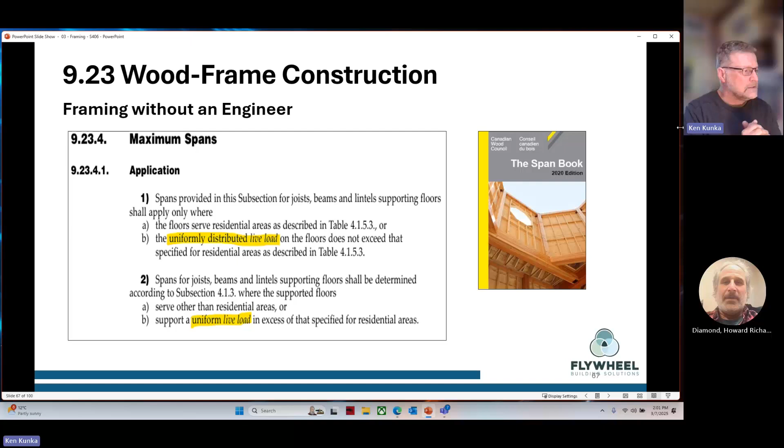This becomes problematic when we're dealing with commercial buildings and somebody has added a mezzanine, a storage mezzanine, or a working office mezzanine. You can no longer use the span book or Part 9 of the code for that, because it's basically going to a very high loading factor beyond this Part 9 table diagram, and again supporting uniform live load. So we're kicking it back into Part 4.

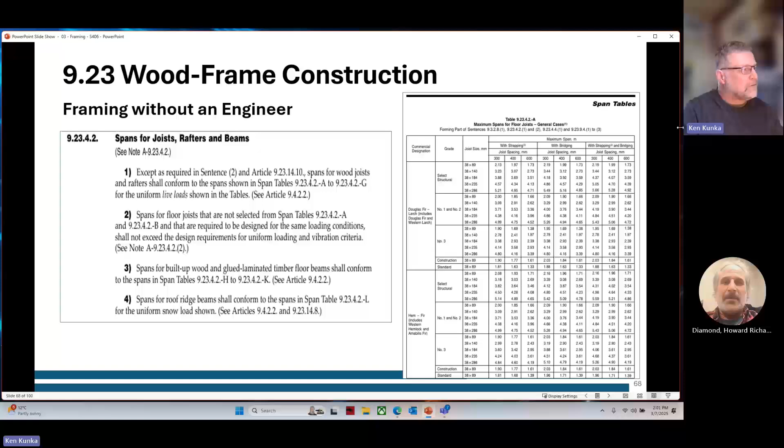Framing without engineering, lots and lots of span tables in the code. Again, just a reference point, this is spans for joists, rafters, and beams. There's a number of pages in here. I particularly like, as a designer, looking at the span book. One, the span book gives you some really good diagrams of joist spans. So we have on the left joist span, we have rafter spans, and we have a good explanation of what supported length and spans are, both for floor systems and for roof systems.

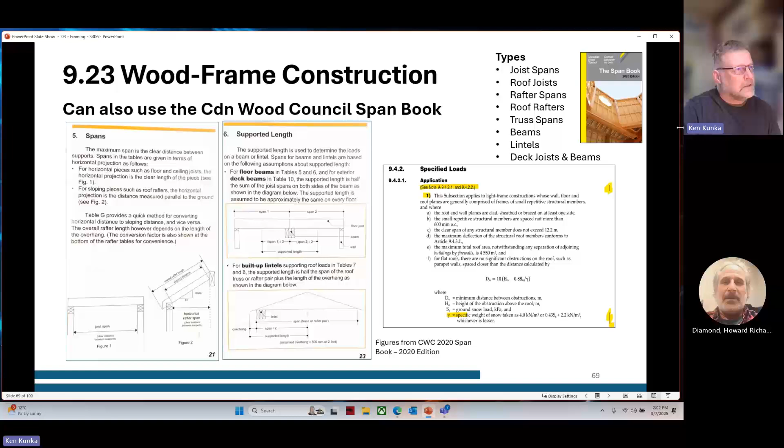And again, a reminder of what's outlined in 9.4 is also outlined in the span book, so the loading factors of dead loads and live loads and spans are all consistent in here.

Being mindful that even if you have an ICF wall, which are quite thick, you may only have a 2x6 plate. So that bearing element actually goes to the edge of that plate, not the wall. You may get to the point where you're a few inches off, and that's something to confirm with your building official if you're that close. But you have to be careful where your bearing point is.

And you look at your roof and the engineered roof span. Span is across, and the supported length of that roof system element of the truss system is to overhang to the center line of that truss system.

Going to quickly go over a few joist floor selections using the span book. In our table here we have a joist span interior wall, so we have a center point of a 24-foot wide building. The center line of that beam is 12 feet off the outside of that structural framing, and then moving in we have a slightly thicker wall - probably a 2x8 wall. They may have a joist span of 11 feet.

We have a wood element, so we have the species spruce, pine, fir. Now we'll figure out how to size this joist to make this happen. This is our flooring element here. So when we look at this part, we have a 2x8. If I look in here with some standard subfloor thicknesses and construction methods, looking at strapping, we also have to be careful of our strapping and blocking of how that's tying the whole system together.

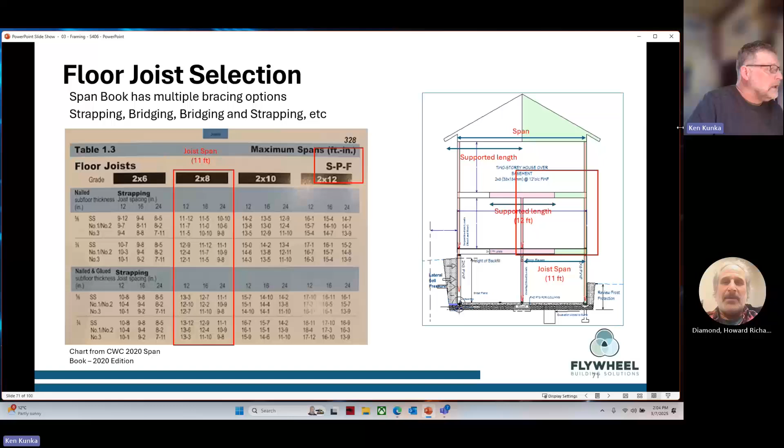So at 24 inches, but then now we're looking at 16 inches and we're finding more prescriptive elements of 11 feet 12 inches, 11 foot 7 for number 1, number 2 species at 3/4 inch subfloor and the strapping. So that seems to meet.

Now we're looking at the center aspect here of a built-up floor beam supporting not more than 2 floors in a house. We're developing a supported length of 12 feet, and we're looking at the maximum span. Maybe difficult to see here, right in the middle between our sectional and the span table, we're dealing with a column spacing of 12 feet. So we have supported length - the supported length will be slightly less, but we're rounding up to 12 feet.

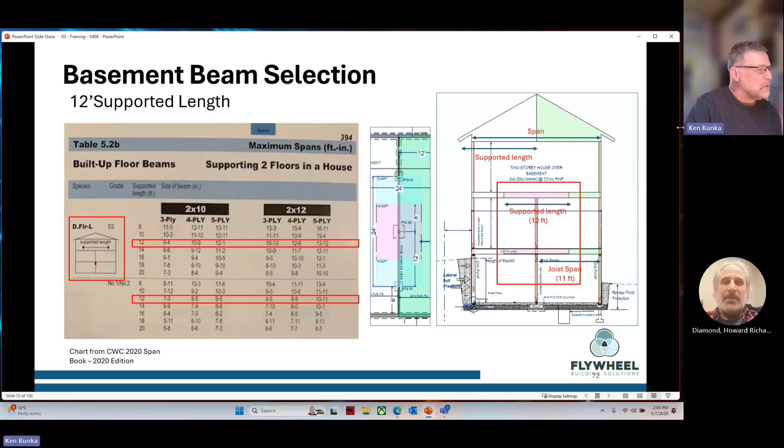And you can see in these line items here what we're dealing with, either a 3, 4, 5 ply 2 by 10 or 2 by 12, moving out to the exterior, and kept these spacings quite small. We could expand, but then we run into perhaps some issues with actual footing design.

And we had worked on some designs in session 2, but we're looking at a live load of 1.9 kPa, or 40 pounds per square foot. And we look at not only our joist span of 8 feet and what we're doing in supported length, and we're coming down here in these highlighted areas.

So you have to be very mindful what you're using, because it can make a difference.

So if we look at a 2x8 at 16 inches on center, spruce pine fir, we've gone from 11 foot 11 inches down to 11 foot 5 inches. So you can see it, we're losing roughly about 6 inches there.

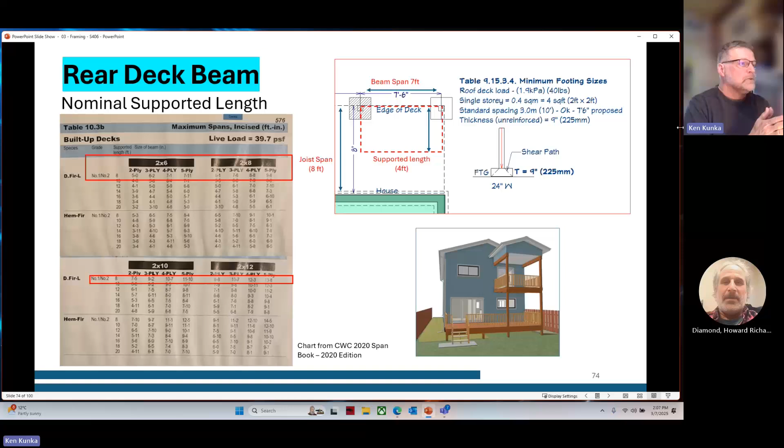The deck supportive beams, built up deck beams - again, very light loading. We've got one level, a supported length of only 4 feet when total joist span is 8 feet. Looking at the grade, Doug fir, we can use spruce pine fir, but in this case we have a live load of 1.9 to 39.7. And then we look at the supported length, and we can get into pretty high live loads, but you also have to think your thinner your beam is, the harder it is to tie to the post element. So that's why typically we'd probably use a 3 ply, using the proper connectors in those elements.

And quickly going through deck and balcony designs - this is one major failure point in Canada and North America in general. It's unfortunate we haven't been able to deal with some of the structural concerns, namely ledgers.

I did do a session for our BOABC building official members, it's posted online, and I have a link here. I just recently did another one with some updated information, particularly how we're dealing with spans of beams and posts, but also looking at the restrictions on footings and pier concrete footings.

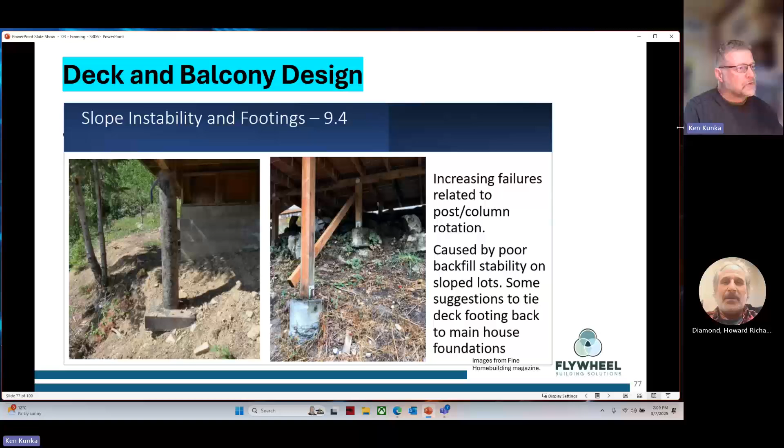So it's really important to understand your soil conditions, your soil capacities, and the landscaping going on around it that may create soil movement over time - then you'll see overturning, and how we're tying back to other structural elements. This is a good picture.

They actually have a lot of articles regarding decks and the proper design of decks in Fine Homebuilding magazine and on their website. The biggest thing to be mindful of is the lateral loading.

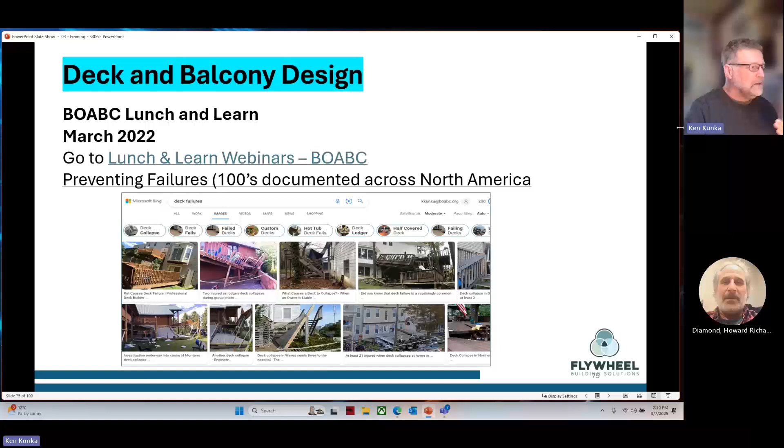As we look back at this picture, you can see a lot of the failures are that - particularly that one on the top left - the deck is in perfect condition itself, it just fell away from the building. So we have to be really careful how we're dealing with this. Again, probably some lateral bracing, some knee bracing would also help on stiffness of that.

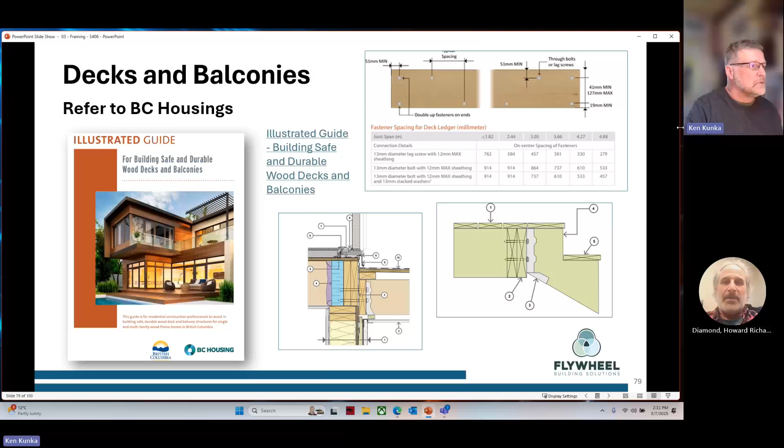That's why I'm referencing this guide. This is an excellent guide. As we challenged the developers of this guide for BC Housing and the engineers involved in it, they actually provided some engineering on the ledger attachment - the lag screws and bolts. As long as you're following this, you should probably be good.

One thing to be mindful of, and a little explanation note in here, you have to be careful how this ledger is attached to the building, and can water get in behind it. You may even want to space that ledger out. In the second paragraph they talk about fasteners - there's ledgers, there's fasteners, your bolts, and your washers, and you have to keep those all in combination. You may actually want to spread that away from the building, if you have a deck that's not like a vinyl deck, a draining deck, allow the water to go through. Decay can build up in those areas over time if they're not maintained, especially if they get some vegetation, and you can start getting some significant challenges on the structural integrity.

You also have to be mindful of the material it's going into - I don't believe this guide does, and I hope it does upgrade to have, if you're going into a rim joist, like a 2x12 dimensional, or you're going into an LVL or some other type, you need the meat to go into the structural element, to create that connection.

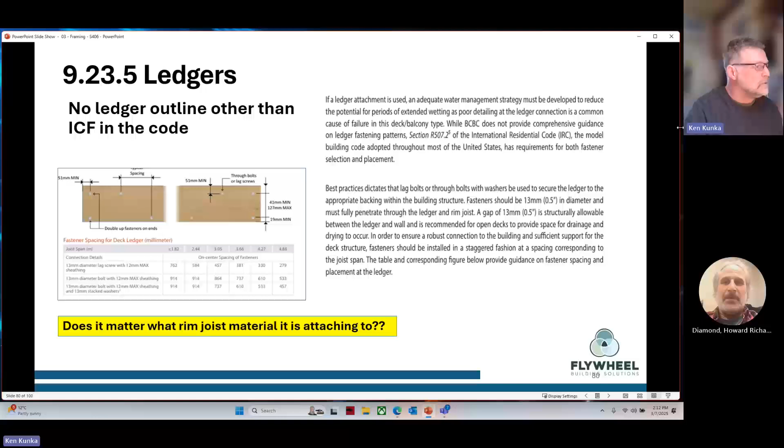I have a really funny story, and again this involved an engineer - a very, very large demising wall, a tenant alteration project where they put in 2x6 walls at 12 inches on center because of its actual size and height. Unfortunately, the tradesperson went in and put their plumbing, their drain waste plumbing system in. They drilled a 4-inch hole through your 5.5-inch deep joist or studs, and they destroyed the integrity - even though it wasn't load bearing, it was designed for its height and for a demising wall with those fire components, so the stresses of fire. That destroyed the whole wall.

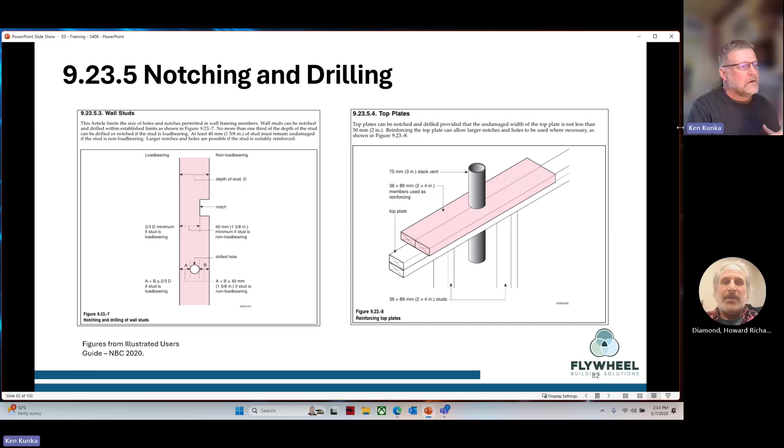So be very mindful of how your framers are laying this out, and particularly your trades. Make sure you go back, talk to your trades about some do's and don'ts, and lead in to help them create some situations where they don't cause problems. We talked a little bit about that in fire stopping in our fourth session. But again, if they do notch and if they do drill, let the persons on site know, so they can make those corrective actions before the building official comes out and has to write those as a deficiency.

But we also see a lot of proprietary products. You may see that's missed, and now we have a drill and we have a quick bolt. Typically, an anchor bolt is set in the concrete. It's either dry set and poured, or it's wet set, but it's not drilled after. And again, that can create problems for the building official.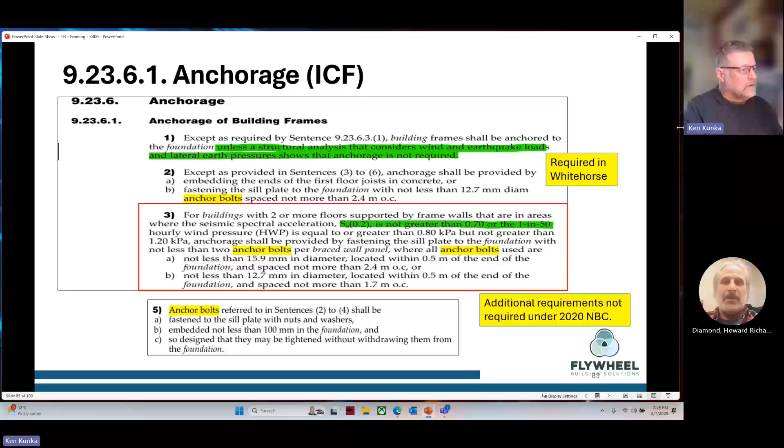And down at the bottom, sentence 5, anchor bolts, again, very prescriptive, and the depths and the size and the nuts and washers, but you also want to tighten them down, because we had mentioned things shrink, the percentage of moisture content, and you want to tighten those down as you're moving into a framing inspection to make sure they're nice and tight. Diagram provides some updated outlines of this, and I won't get too much in detail.

Very specific, non-specific though, when we get into columns and posts, they talk about how you need it and why you need it. Columns and posts shall be anchored to the foundation to resist uplift from lateral movement. So talking about that lateral movement and things shifting.

Supporting joists and beams shall directly anchor to the ground to resist uplift. Again, we also have uplift from wind happening. And again, we get the wind gusts, so we want to make sure it's in block.

There are some exceptions, and that's highlighted in sentence 3. Anchorage is not required, and again, outline some basic or very basic platform deck. So that's maybe one way in Whitehorse of dealing with these very low profile decks, is just sitting on the ground. There's no roofs above them. They're limited in size. They are not, again, attached to the structure in itself and causing that up and down action that we referred to in session 2 of the deck and the roof element of a porch, causing some pretty significant problems. But there isn't really anything in there.

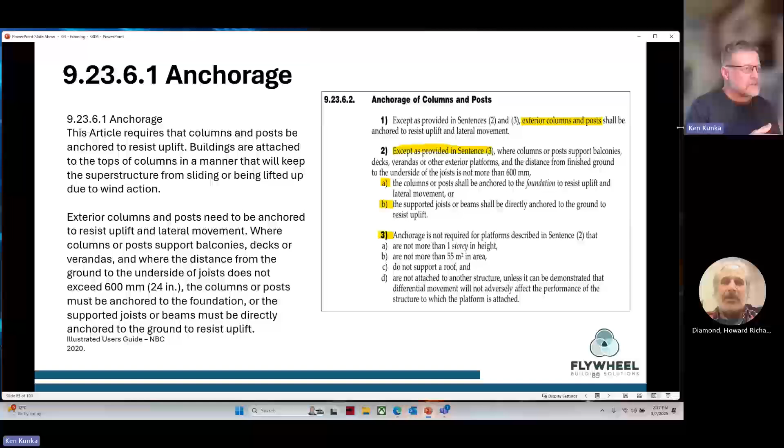And I think we have our saddle anchors, we have proprietary products that I think over time is known, but again, there isn't anything specific. We do have some details on screws and nails, but again, nothing specific. So it becomes a sense or part of common sense to ensure that you're tying all your vertical and horizontal elements as best you can within this, without having too much guidance in it.

Staff also want to do a reminder on concrete footings within the standard and the way anchor bolts work. So you do need that squash block for anchor bolts. A squash block of the same cross-sectional dimension as a bottom plate shall be nailed on the top of the bottom plate with an anchor bolt passing through it.

So be, again, very mindful when you're laying out your concrete footings, and if you're either embedding or wet doweling, that you have the proper length of anchor bolt to have this element properly set up in the length that it needs to have on its embedment.

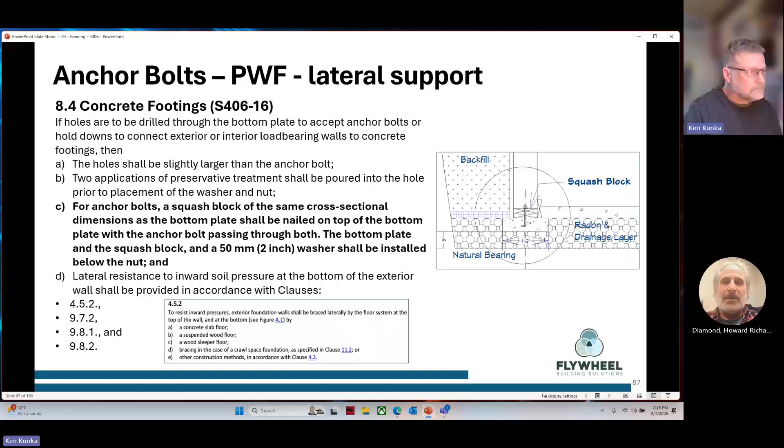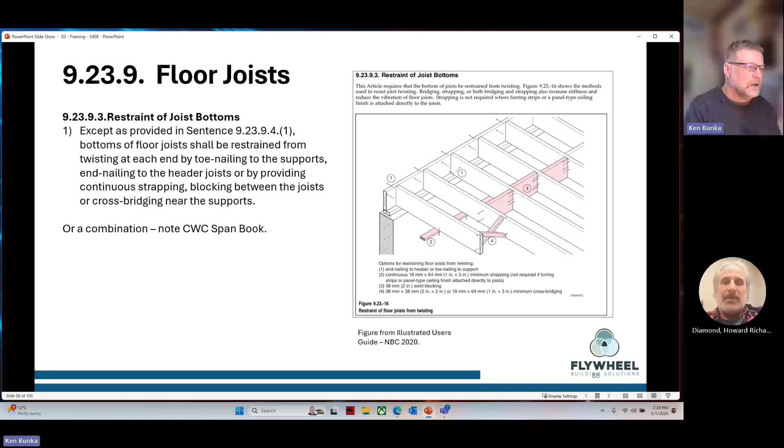Restraint of joists and of the bottom joists. This is critical. So especially in the span book, they give you 3 different elements to work, or a combination of, and that decreases because it's tying everything together. So not only decreasing the deflection and bounce, but the structural strength of it as well. So you can use these in combinations and get a longer joist span in it. We talked about that detail for the deck designs.

So in the code book itself, and this is the only area that can find cantilever joists, they talk about a house floor joist cantilevering, and house floor joists can actually carry a roof line or a roof load. So cantilever portions, again, sentence 1, floor joist supporting roof load shall not be cantilevered more than 16 inches beyond their supports for a dimensional of 2x8, and using not more than 2 feet beyond their supports where you're using 2x10. So it sets that limit for floor systems supporting a roof.

Cantilever portions shall not support loads from other stories unless calculated. So again, if you're supporting more than 1 story, you are moving back into a structural part 4 design. And then if you're cantilevering out so far, in sentence 3, it should tie back.

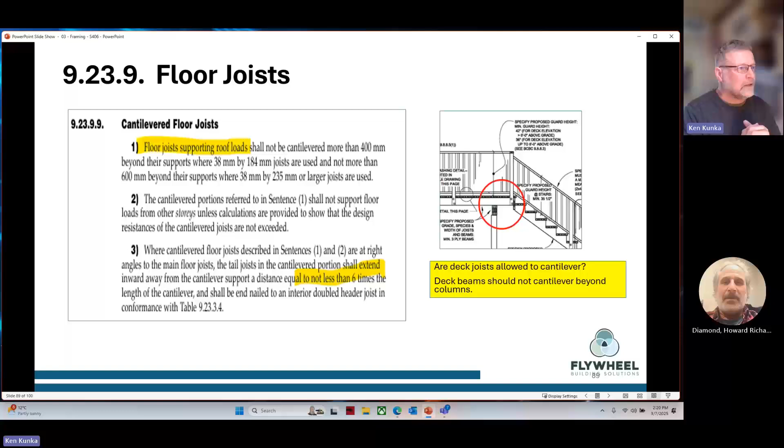And a lot of times we don't see that, though. It's usually not 6 times, it's usually less. And I think over time we've found an equilibrium on that. But it doesn't necessarily talk about deck joists.

When you go to the span book, the BC Housing Illustrated Guide, and even in the newer document or the older document I found more recently, Prescriptive Residential, they all talk about a maximum of 2 foot cantilever, and that's how they lay out these joist span design books. One element I saw a lot more in homes built in the 70s and 80s is these little bay bump-outs that may support a small roof above for a dining room or a hutch. But you're not supposed to tie your structural deck elements to that.

Those deck elements, the framing should tie back to the house. This is a good example of old school framing using squash blocks instead of hangers. So many things going on that this building official saw at a renovation: one, this may be a deck built without a permit because of the way it's framed, or two, this was not really thought out well on the framing of the original house, and either way it should be corrected.

You can also see it obviously has some moisture damage in the deck element itself, and that may be caused by sagging at that connection where the deck and the bay have flexed over time. Because it's not a good structural framing connection, it's allowed moisture to get in there over time and rot it out as a decay element.

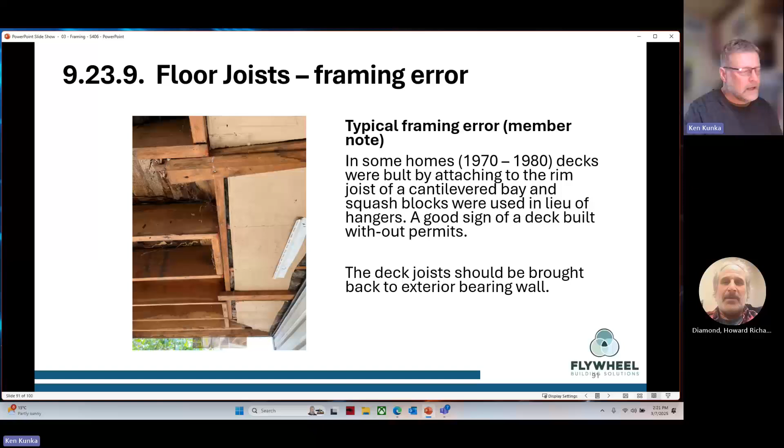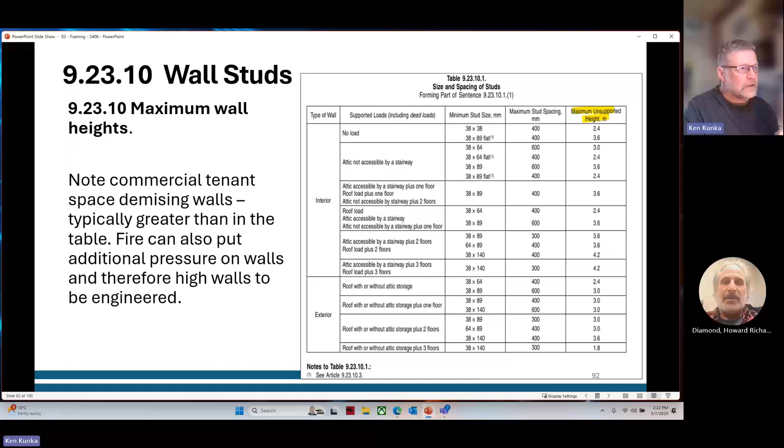There are maximums to the height of walls, and I wanted to provide this in 9.23.10. You'll have to be very careful of interior versus exterior and load bearing versus non-load bearing on this, and again it sets that height limit. I had mentioned the demising wall and the plumbing getting drilled through those walls—well, that needed to be designed because it exceeded it. One, it wasn't residential, and two, it included a very high wall that wasn't load bearing, but it was over the limits of the allowable.

Non-load bearing walls are not required to have a fire resistance rating. I talked about that demising wall—when you're dealing with fire, it creates different stresses on that wall element, and depending on how it's tested, it has to be structurally sound. That's why it's really important to pay particular attention to interior, exterior, non-load bearing, load bearing, and whether it's part of a fire separation component.

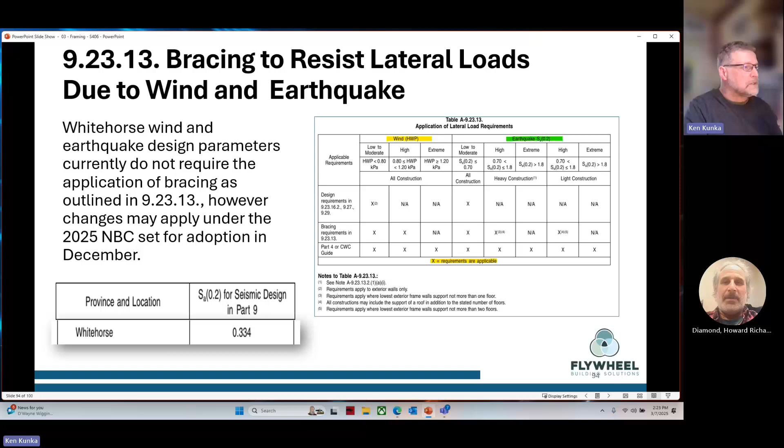Almost coming to the end here, 9.23.13, bracing to resist lateral loads due to wind and earthquake. Just a reminder, we're not there yet, but we may see some triggers—not in seismic, as noted here—but we may start seeing complications when we get into wind loads. We'll know more near the end of this year into December 2025, with adoption and full rollout expected in 2026. That's about all I have for framing in the time we have.

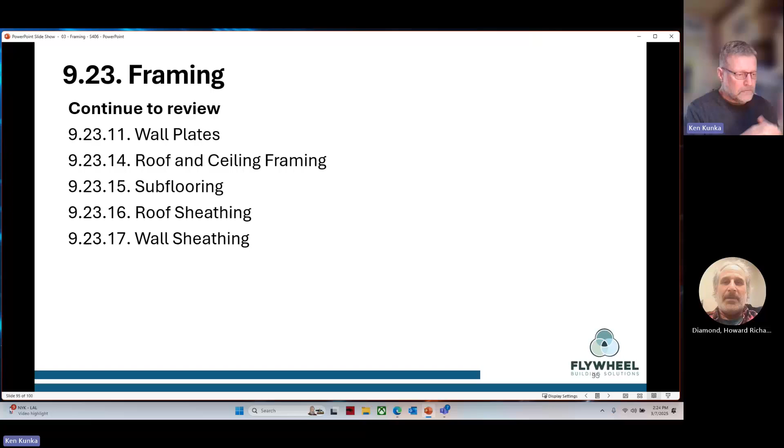I hope I've been able to cover some of the critical areas, especially in decks and the deck failures happening out there, being very mindful of the structural connections in both decks and in your wall, beam, and roof assemblies. Again, being very mindful of when engineers should be involved, and when you can stay in Part 9. Where there's gray area, you really have to be careful. Please continue to read through Part 9, 9.23, wall plates, roof and ceiling framing, subflooring, roof sheathing, and wall sheathing, all very prescriptive of fasteners, type of use, and spacings.

Just wanted to finish off, as a reminder, we talked a little about what should be on a drawing. Pretty important. The drawing shows substantial compliance with the code, particularly when dealing with structural dimensions, sizes, point loads, and transferring your floor systems. You may have a floor layout, particularly an engineered truss layout, transferring all that information together. When we're going out on site, we're at foundation and damp proofing.

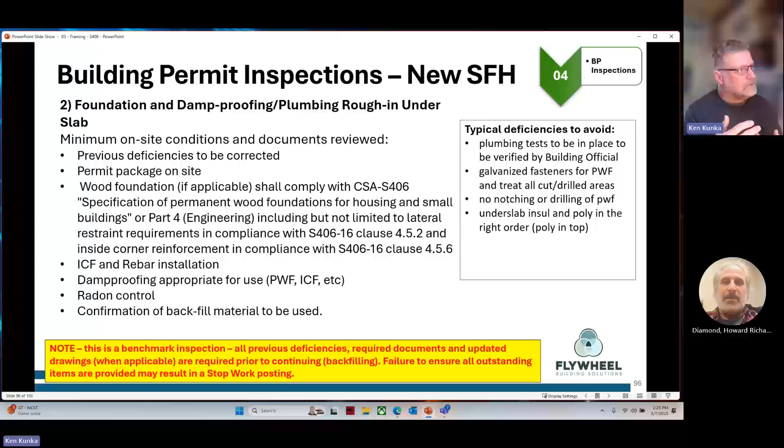You have to be aware that what's going on above in the framing has to be transposed down to the foundation. So we have to know the foundation is set up properly, and even where the footing pads are located, to make sure we don't have any framing problems. This is a benchmark inspection, so anything leading up to this type of inspection, all these elements need to be done. We're dealing with wood foundations, but also with some leftovers perhaps from a previous inspection. This is before we backfill, so we have to make sure these are all done. Ideally, with the backfill, we have the superstructure started on top to create that bracing element.

Framing, roof and parallel chord trusses, individual designs, sealed. We have to be very careful when looking at our beam systems, our parallel chords, or trusses - those have to be designed appropriately by a recognized Yukon engineer. Your floor, I-joists, and other engineered frame components - the requirements for seals will depend on the complexity, whether they are point loads. As such, requirements for seals will be determined and communicated as a condition of the issuance of the building permit.

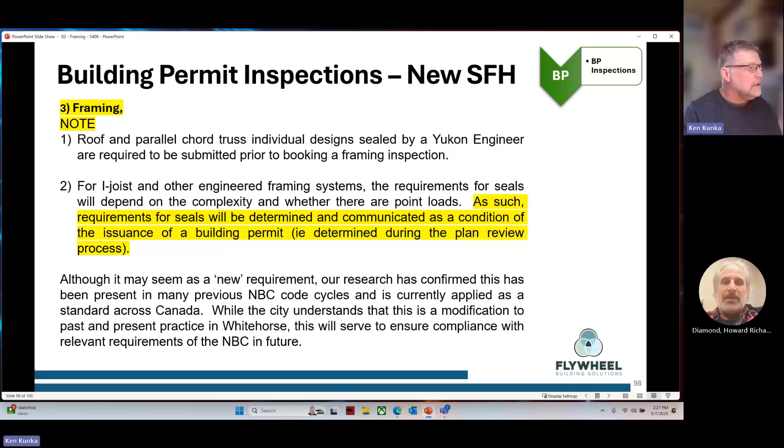Drawings come in, so do the best you can as a designer and building team to get all the structural information on there. If we're in these gray areas, your building official plan reviewer will reach out to you with enough lead time to try to make this happen. But try to be proactive. If you're seeing a lot of big beams, a lot of point loads, a lot of complexity, you're more than likely going to need the involvement of an engineer, and that engineer of record will have to look at these shop drawings and incorporate that into there. So again, when in doubt, reach out - reach out to Development at City of Whitehorse.